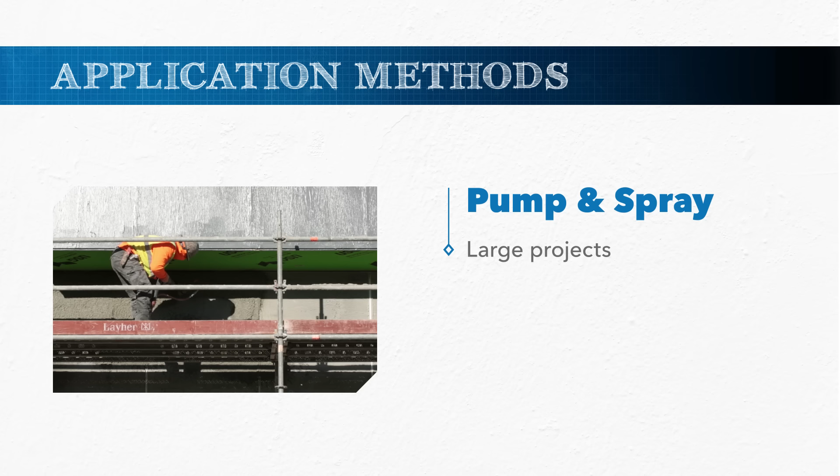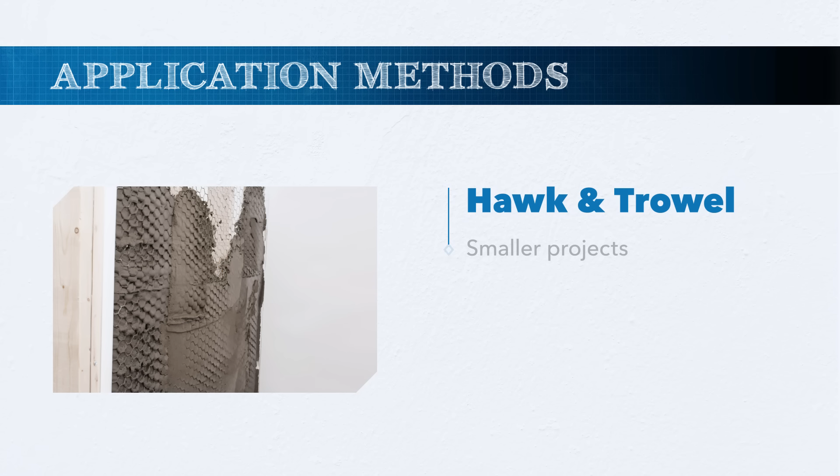The pump and spray method is often seen on larger projects where volume is needed. This method can improve embedment due to the pressure of the spray. The hawk and trowel method is often seen on smaller projects. The method relies on the installer's skill in applying wet stucco into and through the openings.

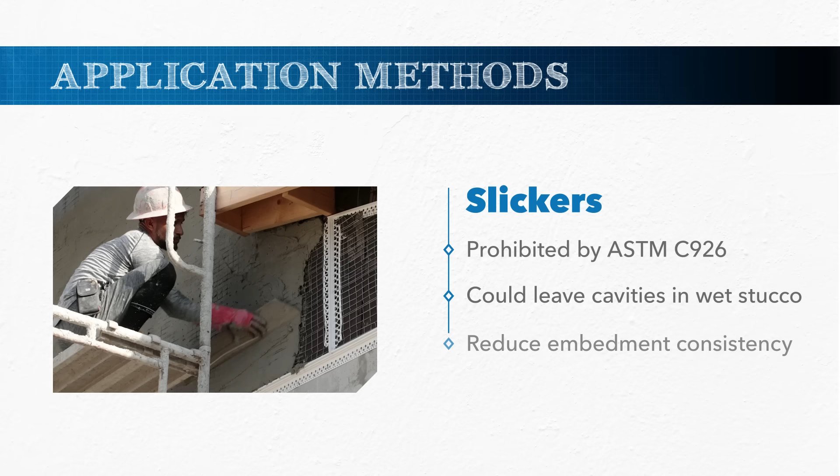As for the use of slickers, a trowel-like tool that applies a larger quantity of plaster, this method is prohibited by ASTM C926. While contractors may prefer this tool, it tends to create cavities in wet stucco and may not fully embed the lath.

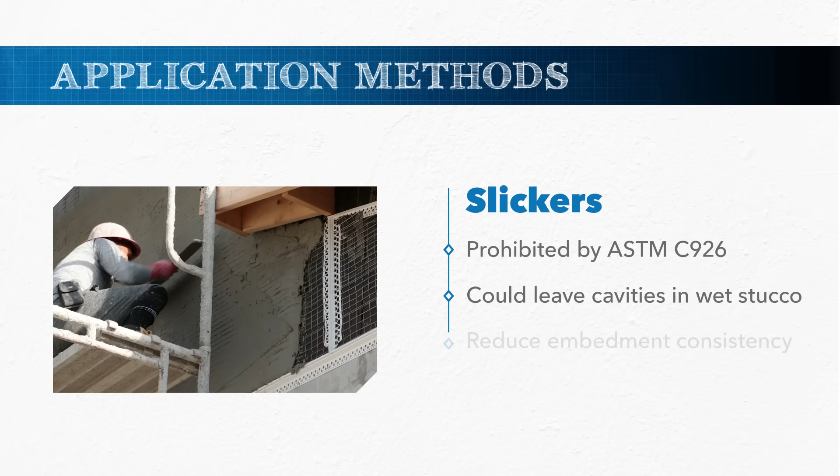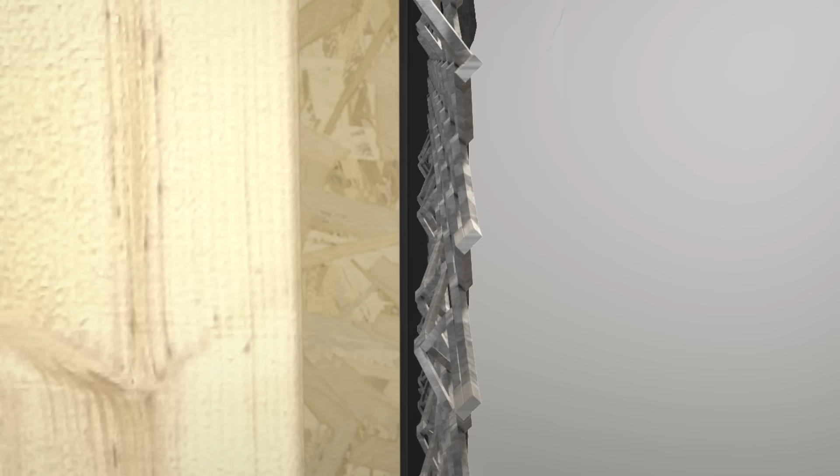As mentioned, issues stemming from improper embedment include cracking, as well as moisture intrusion that leads to corrosion. Cracking may occur when the scratch coat does not embed the lath properly, often because it is only applied on top of the lathing material, like icing on a cake. When the wet plaster that sits atop the lath in this fashion begins to cure, it does so more quickly than the plaster that is properly embedded behind the lath, and this premature drying can contribute to cracking.

The lack of stucco and lath connectivity can cause these materials to move independently of each other when subjected to seasonal weather changes, resulting in thermal deflection. These movement cycles may, after a period of time, widen small existing cracks and allow bulk water to enter the wall cladding.

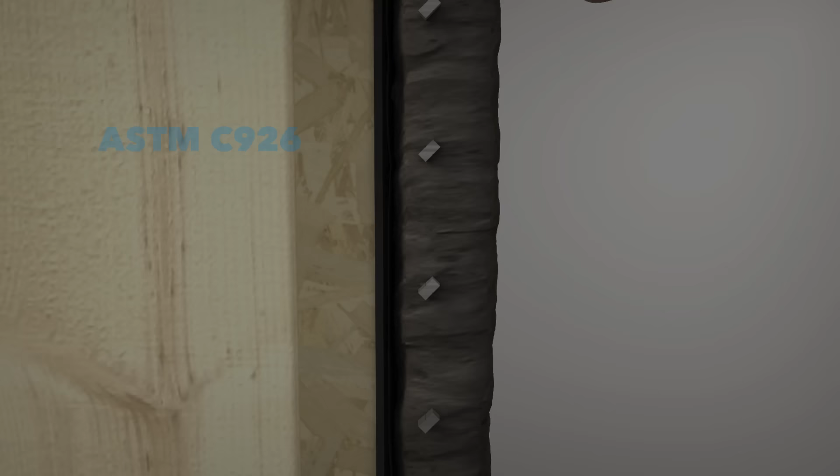Cracking can be prevented by the lath's design, which enhances embedment by creating a monolithic cladding that moves compositely, rather than as 2 separate materials moving independently of one another. Thoroughly embedded lath in cured stucco acts compositely, like rebar does in concrete.

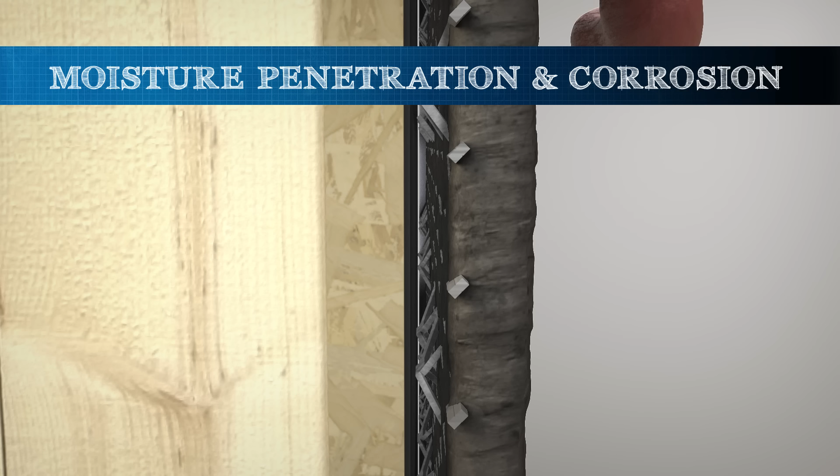Proper embedment is also critical to prevent moisture penetration. The better the lath embedment, the less likely the material is to oxidize and eventually rust under the stucco cladding. Incidental moisture that may enter the wall system can cause rusting and corrosion of the metal lath material if not allowed to dry out.

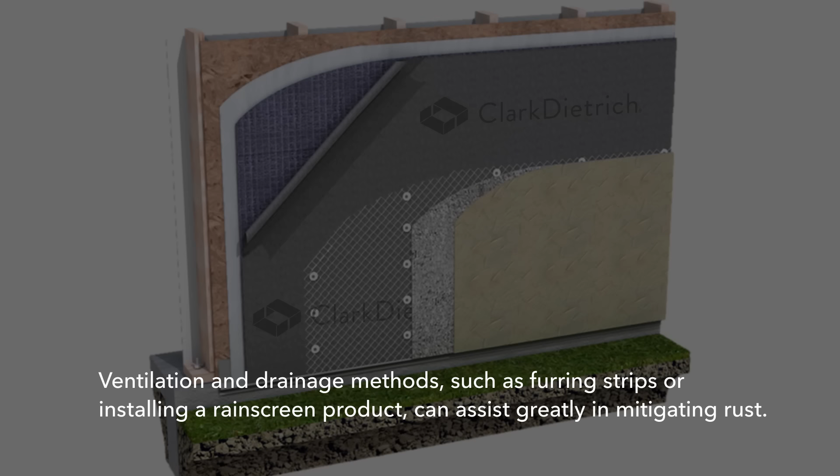Wind-driven rain and vapor drives moisture through the stucco to the weather barriers, resulting in condensation adjacent to the bare lath. If not dried out, oxidation begins, and the 3 mils of zinc coating protecting the expanded metal will eventually expose the carbon steel and cause lath corrosion and potential stucco failure. When the wall system combines proper embedment with adequate space for drainage and ventilation, the cladding is more likely to resist rust and corrosion.

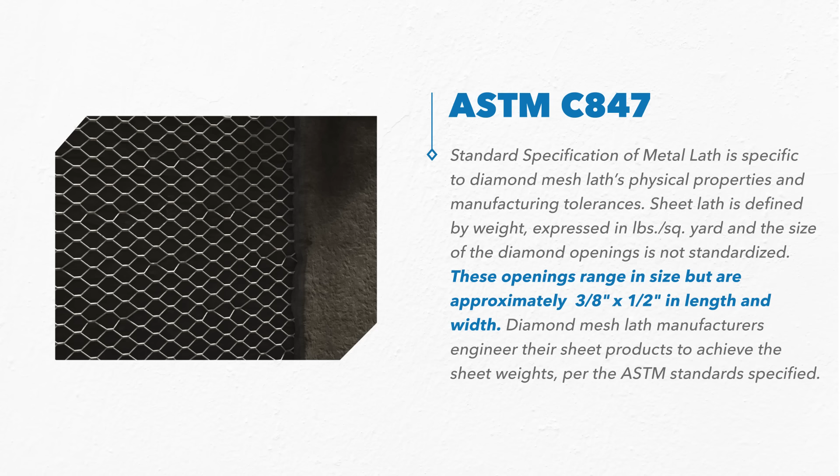Now let's examine the 3 types of lath in terms of their propensity to achieve full embedment. As per ASTM C847, which specifies the physical properties of metal lath, diamond mesh lath is formed from sheet metal that has been slit and expanded to create keys or openings that are approximately 3/8 inch by 1/2 inch. Let's look at the application of stucco with diamond mesh.

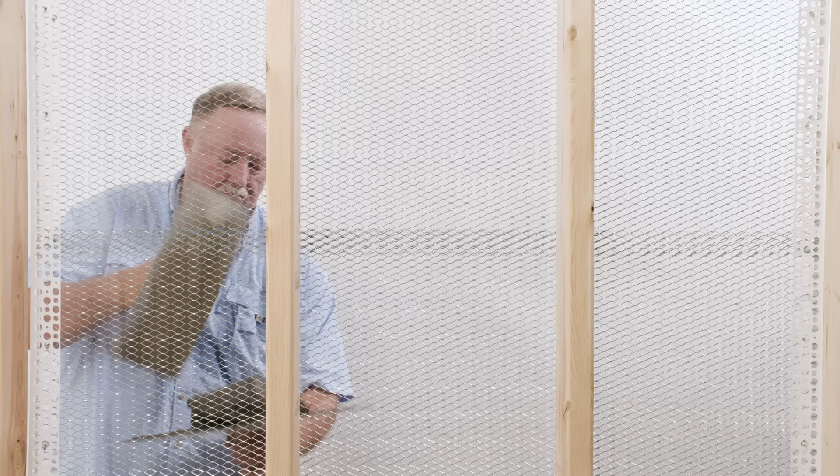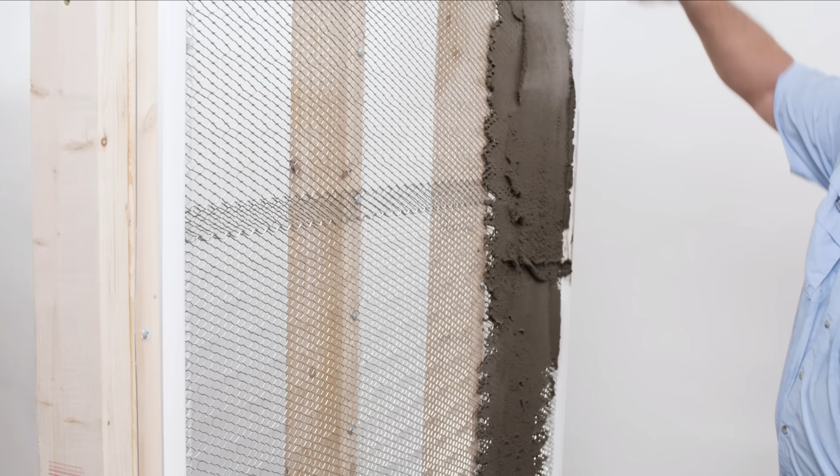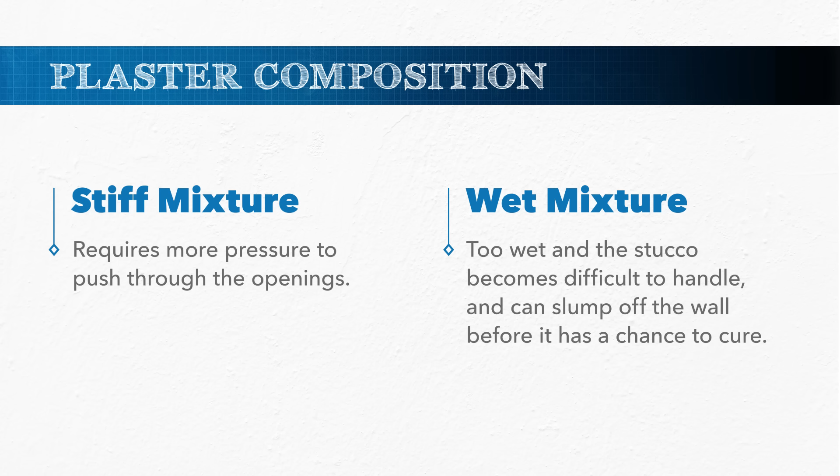Contractors often mix their stucco stiff, using less water to get better surface contact. This stiff mud can increase the difficulty of pushing the stucco through the diamonds, reducing the ability to achieve embedment. With diamond mesh, it's critical for the installer to get both the ideal stiffness of the stucco mix and the proper pressure when troweling into and through the lath in order to properly penetrate the diamond openings.

Expanded metal lath that is over-fastened to the substrate will restrict the passing of stucco through the diamond-shaped openings in the lath, negatively impacting embedment, especially at the edge joints and laps between sheets.

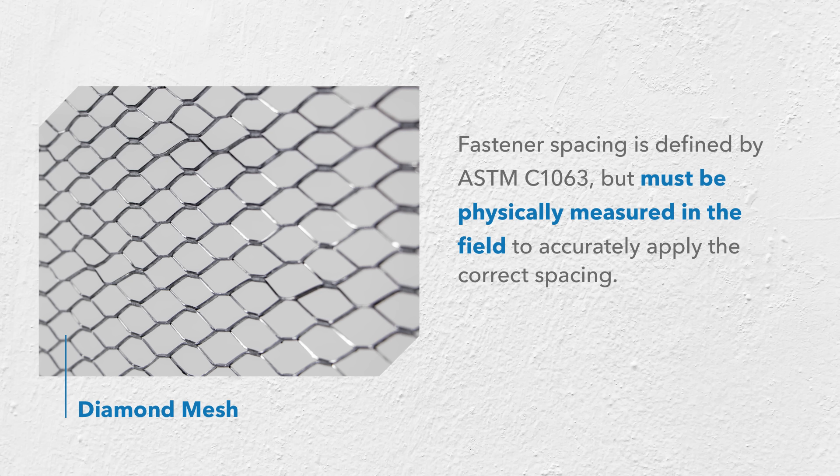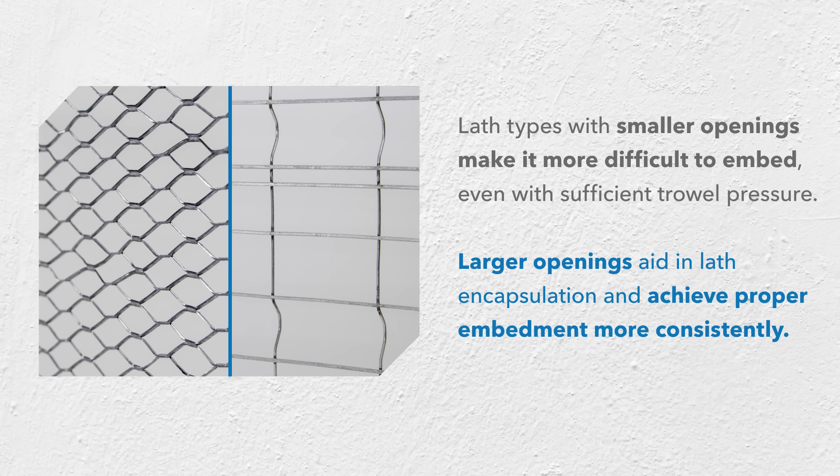ASTM C847 specifies the physical properties and manufacturing tolerances of diamond mesh lath, which is defined by weight. But the size of the openings is not standardized. This variability makes the pressure required to press a stucco mix through the openings different for each competitive product on the market. It is possible to achieve acceptable embedment with diamond mesh lath despite this variability, but the applicator must know the ideal stucco mix and application techniques to penetrate the diamond openings.

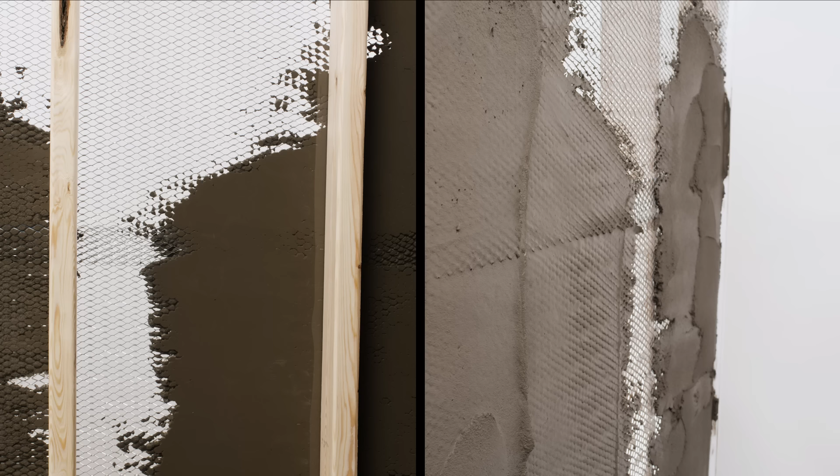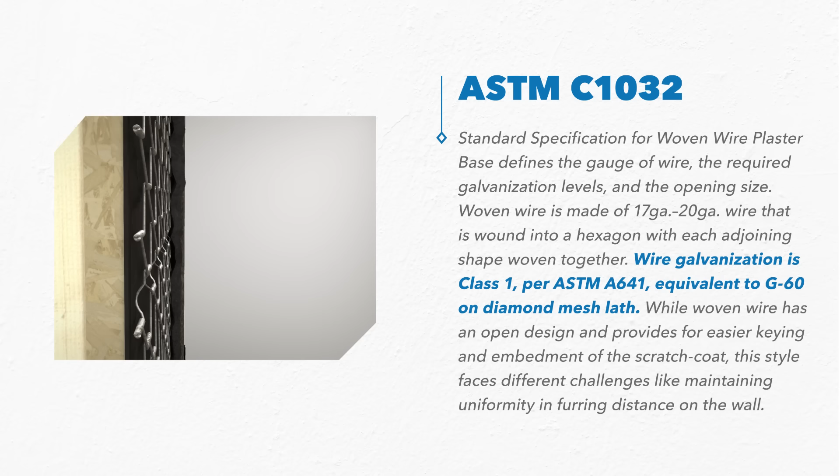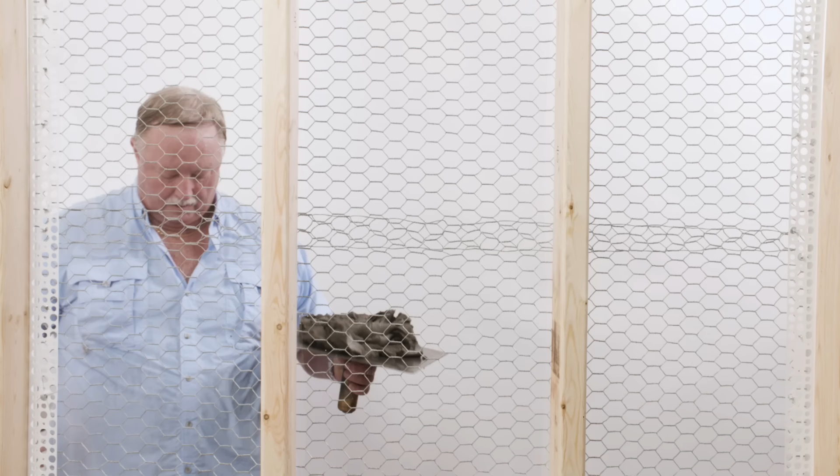Woven wire lath products are made of 17 and 20 gauge wire wound into a hexagon shape, with each adjoining shape woven together, as per ASTM C1032. The galvanization of woven wire is Class 1 per ASTM A641, which is equivalent to the G60 coating found on diamond mesh lath products. This style of lath comes in rolls instead of sheets and has an open design which provides for easier keying of the stucco material in the scratch coat. Here is an application of stucco with woven wire.

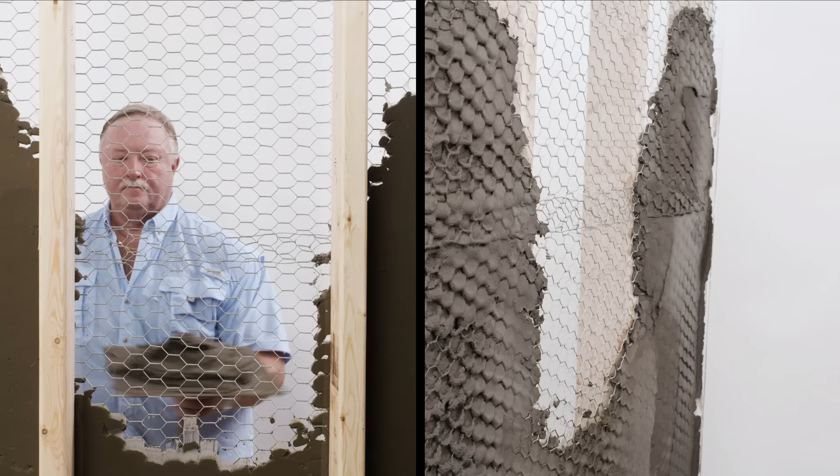While some manufacturers of woven wire make self-furring products, others do not. Without a self-furring product, the installer must create the proper distance from the wall using a furring nail or wad. With woven wire, inconsistencies in furring, as well as over or under fastening, can result in areas where full embedment is lost.

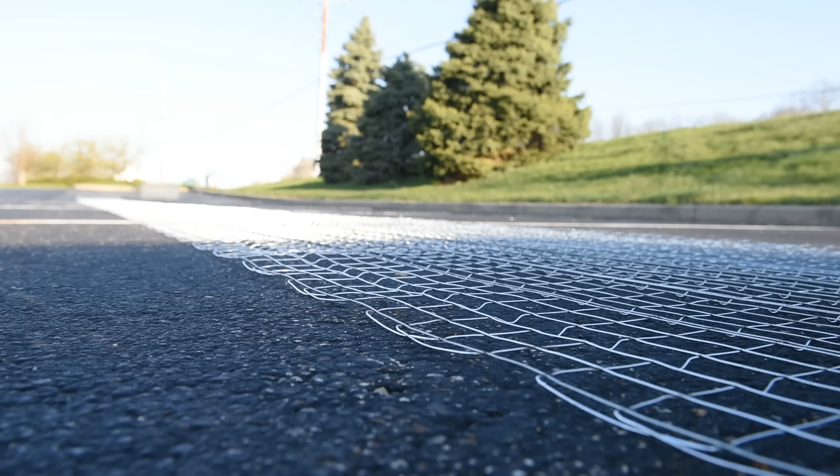Welded wire lath also comes in a roll with an open wire design similar to woven wire. Welded wire, shown here, rolls out with very little memory, allowing it to lay flat, while the tension that is stored in woven wire from the manufacturing process gives the rolls an inclination to wind back up on themselves.

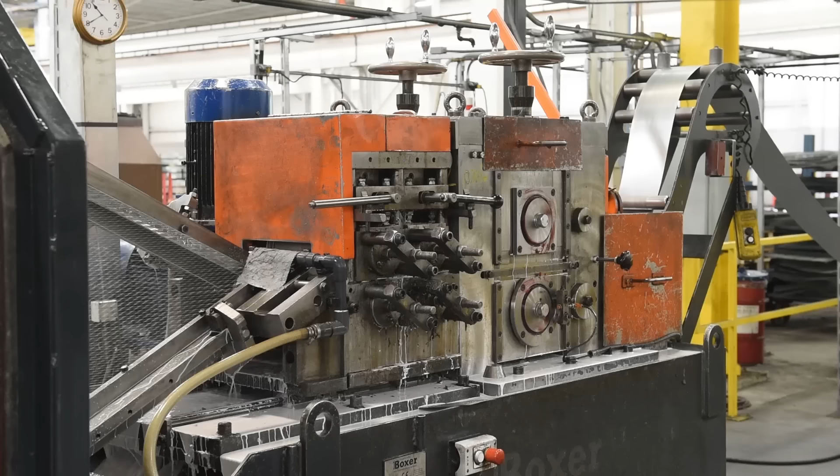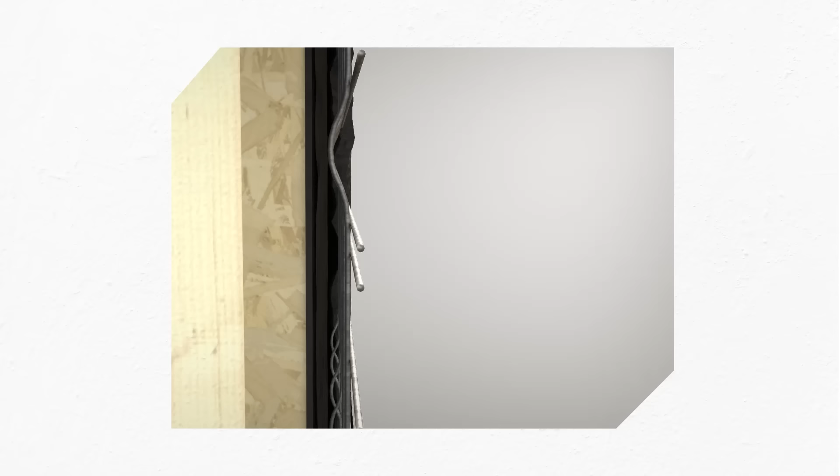Diamond mesh lath is available in sheets, usually around 27 inches wide by 96 inches long, and formed by expanding sheet steel that has been slit and spread apart to form hundreds of keys per square yard. Due to its long-standing history as a building material, contractors are very familiar with lathing material in this format and using it effectively on a job site. Let's watch an application of stucco to diamond mesh lath.

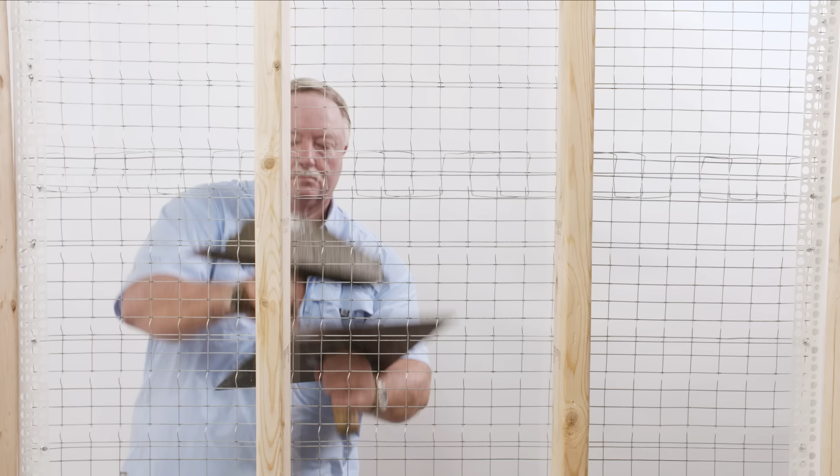Due to the stiffness and uniformity of welded wire, it is perceived to be the easiest to properly embed. With welded wire, installers must make sure the scratch coat is not too wet and slumps off before it sets, or too dry and not fully packed around the wires. The uniformity of the furring found on welded wire lath provides an ideal plaster base for the wet plaster to be easily embedded into the wire reinforcement.

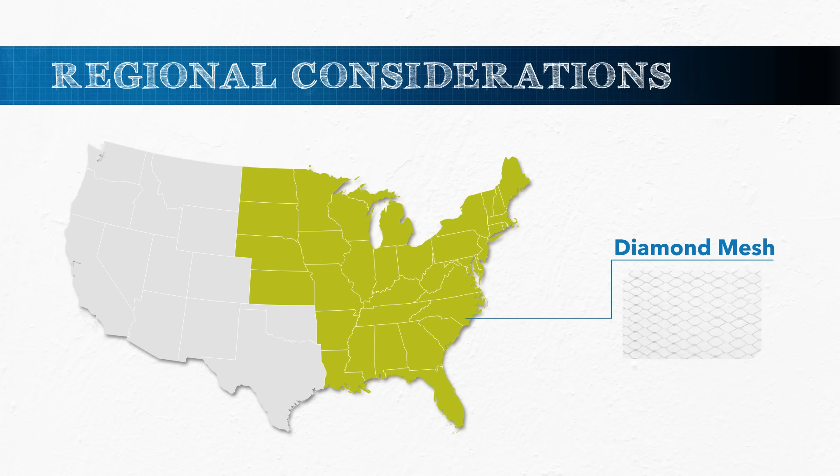It's important to note that there are regional preferences for the different types of metal lath. Diamond mesh has historically been the choice in the Southeast, Northeast, and Midwest. However, welded wire has seen rapid growth in this region due to its quality, consistency, and ease of use. In Texas and the Mountain States, diamond mesh and woven wire are more prevalent. But welded wire, the newest material type, is making steady inroads to this market as well.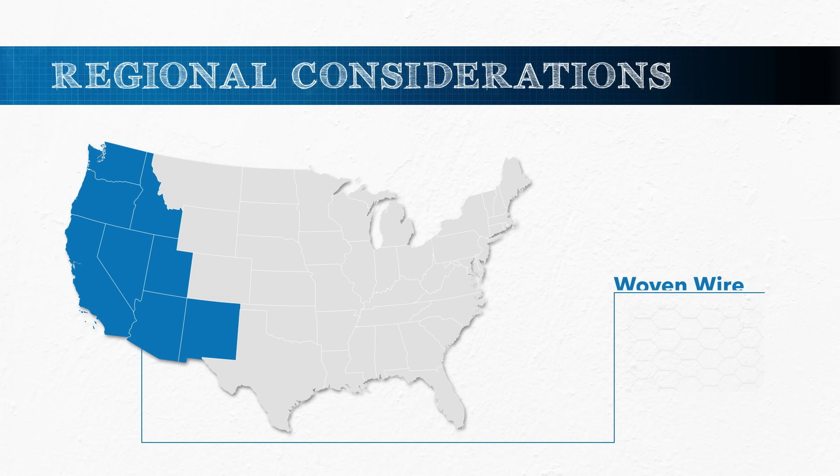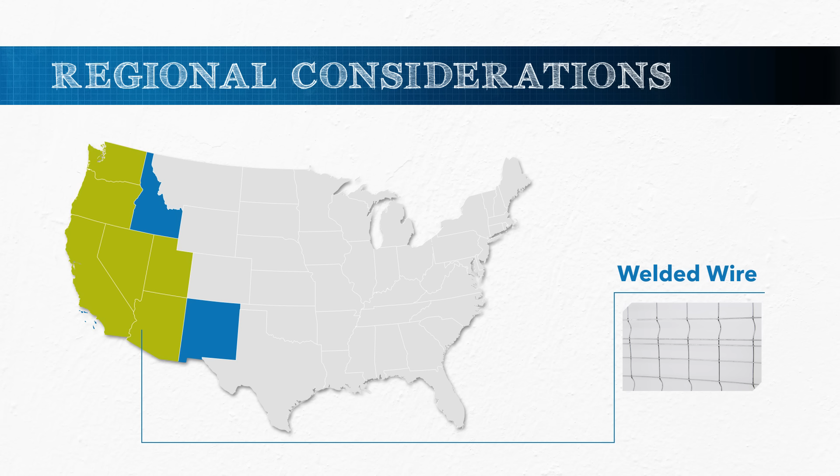Finally, the Western United States and Desert Southwest have primarily used woven wire laths due to their relatively low level of moisture-related issues, allowing them to avoid the issues that stem from furring inconsistencies with woven wire products. Though, in the past several years, welded wire has seen a surge in popularity in this region due to the more consistent furring, improving embedment, and mitigating the non-moisture-related issues, such as the cracking that occurs when the lath and the stucco mixture are not monolithic.

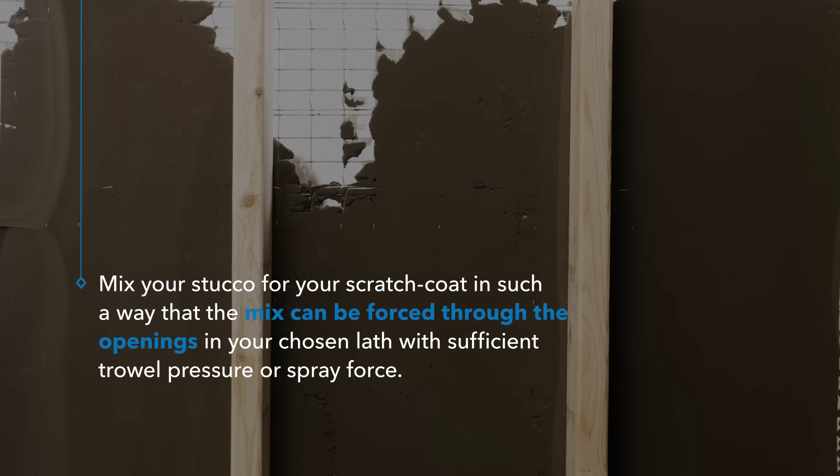Proper embedment is critical to mitigating cracking and moisture intrusion. Ideal stucco embedment can be achieved by following these best practices. Make sure that the metal lath is uniformly fastened and evenly furred across the wall. Remember that while many of these products have built-in features for furring, some of these are more consistent and resistant to damage than others. Mix your stucco for your scratch coat in such a way that the mix can be forced through the openings in your chosen lath with sufficient trowel pressure or spray force.

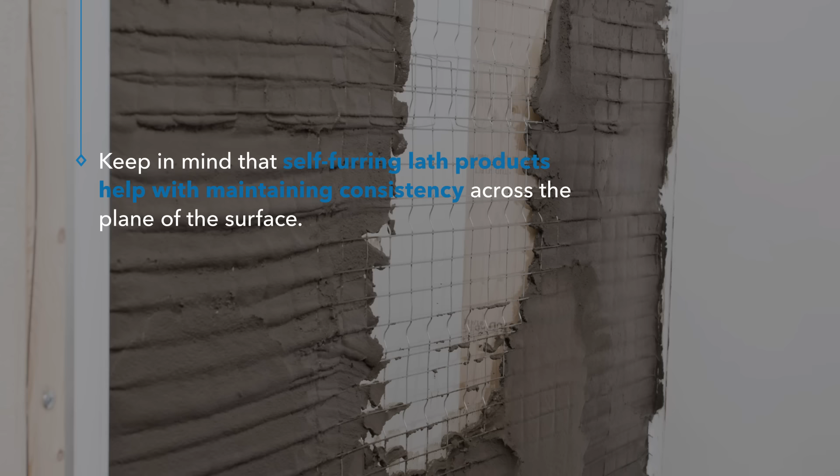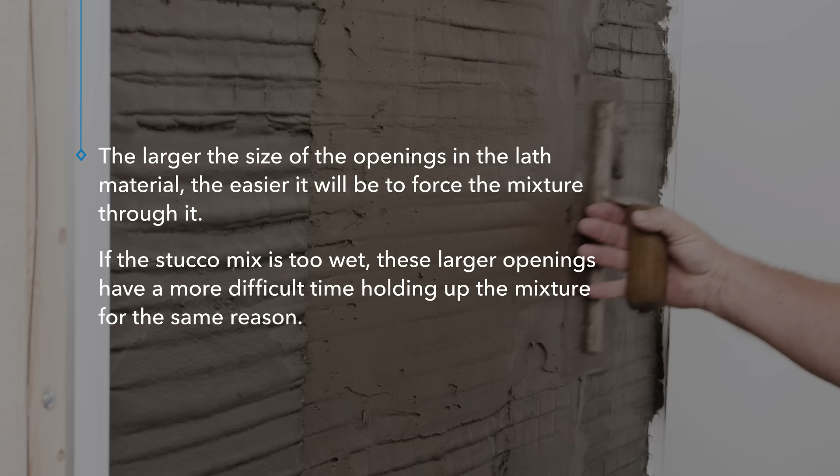Keep in mind that self-furring lath products tend to help with maintaining consistency across the plane of the surface, and open wire designs tend to make proper embedment of stucco easier. The larger the size of the openings in the lath material, the easier it will be to force the mixture through it. However, if the stucco mix is too wet, these larger openings have a more difficult time holding up the mixture for the same reason. Finally, specify the exact type of metal lath and its associated ASTM references that will work best for your project and its surrounding environment.